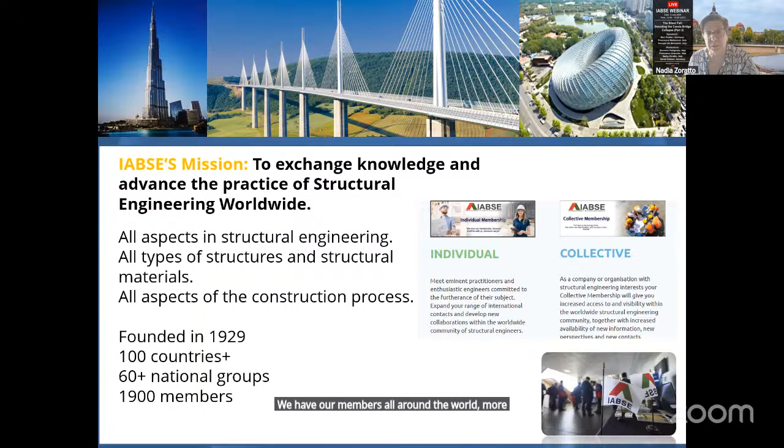If you are not yet a member of IABSE, you can become part of this great organization as an individual or collective member. We have members all around the world, in more than 100 countries, and for this reason we have several national groups that are very active organizing webinars and conferences. In Italy, we have a national group, IABSE IT. It was refounded recently in 2022, and we are promoting several activities related to technical task groups, dissemination activities, and training activity also.

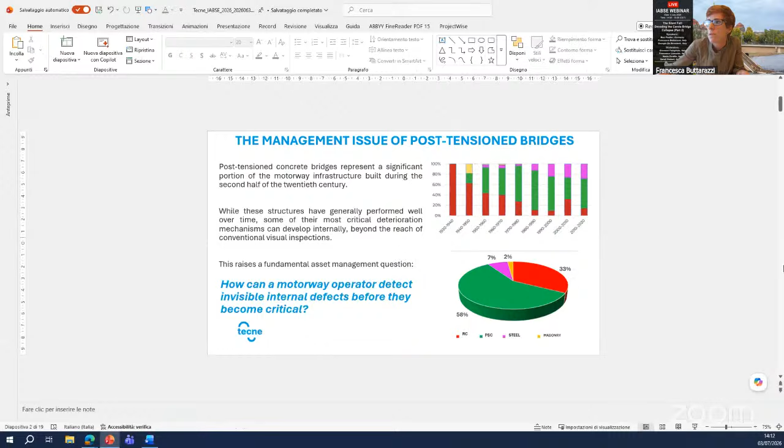So the question was, how can a motorway operator detect invisible internal defects before they become critical? And if you see the distribution of our bridges, you can understand that this is a very critical question for us, and we have to respond in an organized way.

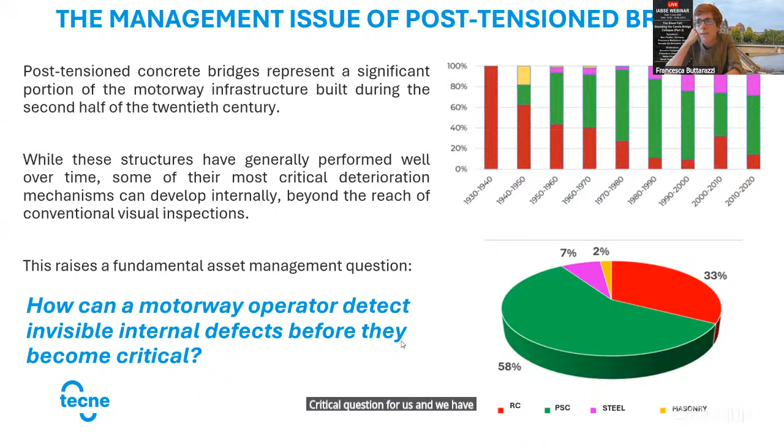To understand the problem it's also important to understand its scale. Here are some numbers about the Autostrade per l'Italia network: we have more than 2,000 bridges with a length over 10 meters, and 1,840 overpasses. The size and diversity of the network mean that special inspections cannot be planned as isolated actions. We have to answer many questions: which structures first, which girder, which cable, which samples, which techniques.

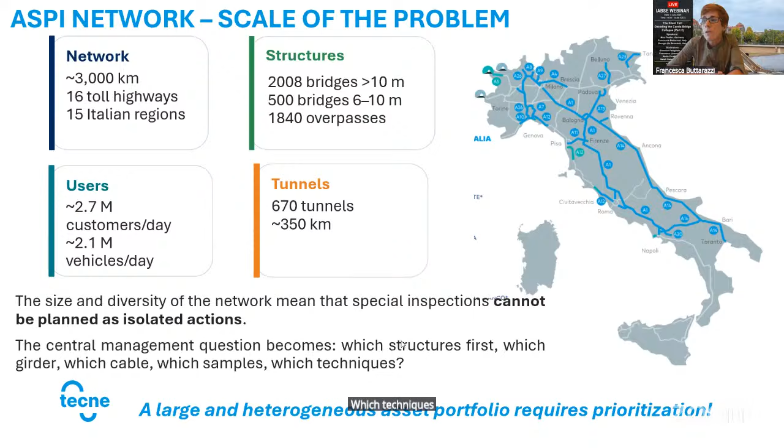This is why the answer has been an organized process that, starting from visual inspection, transforms the data collected during visual inspections into engineering decisions and a management strategy. To do this, we follow this chain of actions: prioritization, definition of sampling, diagnostics, and then we can define the proper strategy to manage the structure.

As you see, all these steps are in some way defined by guidelines. We are working on that, even with the regulatory bodies, with our Ministry of Transport, as well as some consortium of universities. You see here the FABRE protocol, but first of all the bridge guidelines issued by the ministry in order to adopt a multi-level, multi-risk framework for bridge asset management.

But the single manager also has the necessity to produce internal documents, such as the prioritization document or the one for technical regulations, in order to provide technical operational guidance on the various phases, because it's not always the same laboratory or the same engineer that does the inspection on the field. So it's important that activities are done following the same regulations in order to have comparable results.

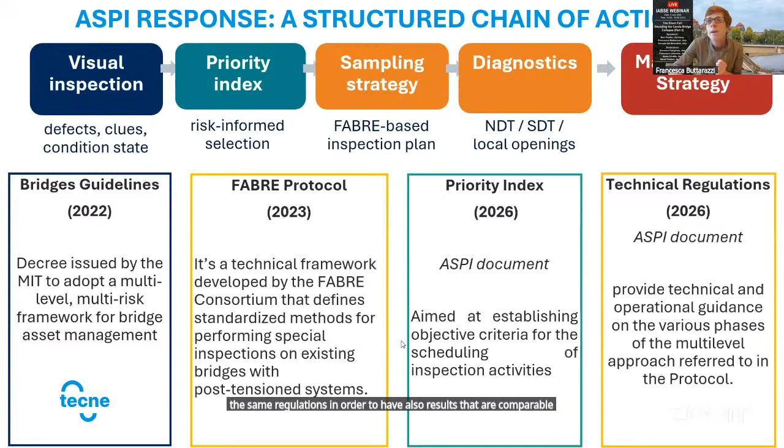Regarding the general framework, I want to give you a brief note on the Italian bridge framework. The Italian bridge guidelines have introduced this general framework to manage existing bridges. This flowchart has been translated - of course it's in Italian, but you have the reference of an article where you can find a full description. You see that the objective of this flowchart is to have an organized sequence of activities.

The objective is to define the interventions needed on bridges, but at the same time, through all these activities that start from the census, to the inspection, then to the classification of risk and the preliminary and accurate assessment, the goal is to reduce the risk of the network, as well as giving managers the priority to assess all the bridges in their portfolio.

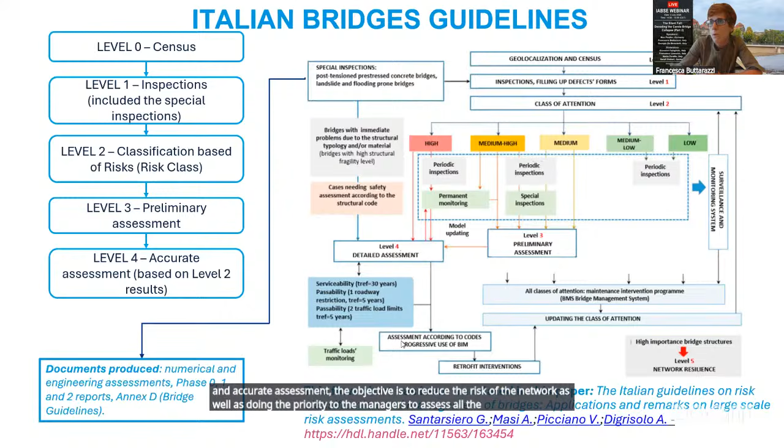So now we will go through the process I have shown you before, starting from visual inspections, which are in any case the first step you have to do, because we have to look for warning signs. These warning signs can be visible defects as well as warning defects.

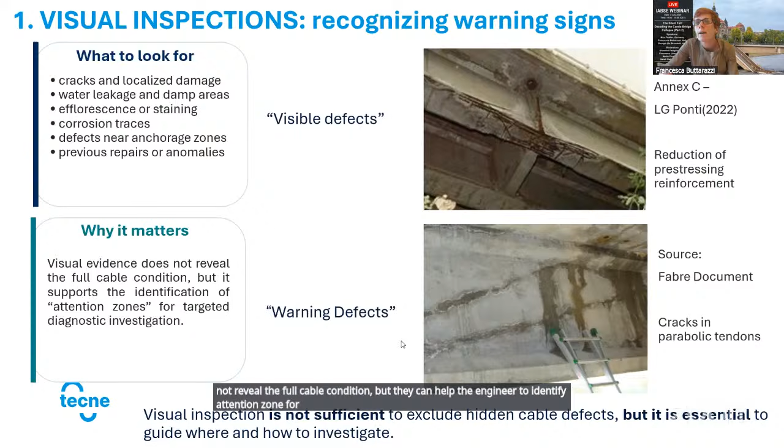In Italy, the bridge guidelines, or the FABRE document, have introduced this differentiation between defects that are evident - so you see cracks, you see the reduction of prestressing reinforcement, you know something is not going well in that structure - but there are also warning defects. These are defects that do not reveal the full cable condition, but they can help the engineer identify attention zones for the following investigation.

After we have done the inspection, we have all the data to do the prioritization. Of course, we also use the data collected in the level 0 phase, in the census. Here, in accordance with the Federal Highway Guidelines, we have defined a priority index that is a combination of a probability indicator of damage and a collapse consequence indicator.

So as with risk analysis, we also have something connected with exposure and something connected with vulnerability. Here we have used the weights defined in the Federal Highway Guidelines. In some cases, we have made adjustments for the Italian situation and also for ASPI's management needs.

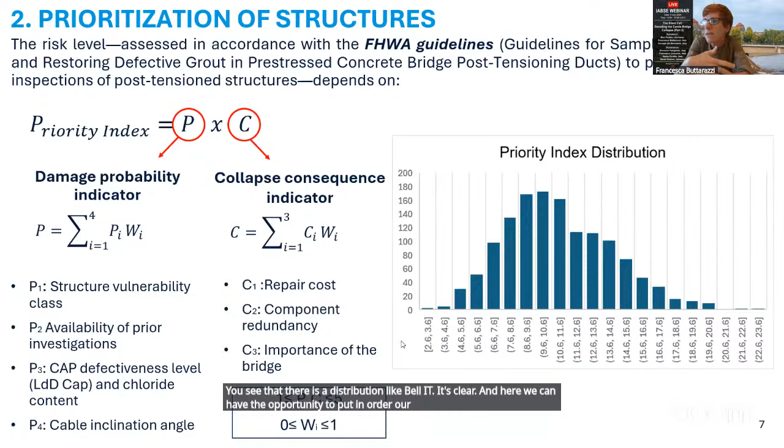After the selection of the bridges, we have another question: what do we have to investigate? Here we are following a statistical-based approach, which was first introduced by the Federal Highway document, as I have already mentioned.

In this case we have to make some assumptions, because we have to define the acceptable percentage of cables with defects. This is something we assess at the beginning, and then we can decide, after the first phase of inspections, if we have to change our initial hypothesis. In any case, we start generally with a 20% acceptable defects threshold, and then we define the total number of cables as a function of the number of beams and the cable number.

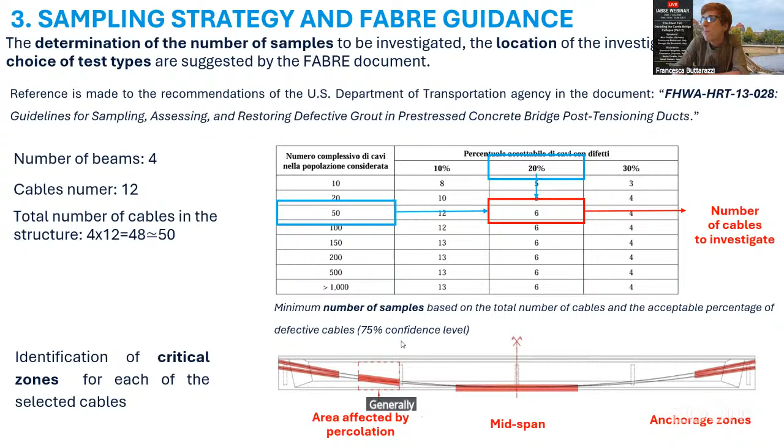For every cable, we also identify the critical zones where we have to do the inspection: the mid span, the area affected by percolation, but also the anchorage zones, which are generally the ones most affected by defects.

What we do now, after choosing the structure and deciding the sampling and where to perform the inspections, is follow an organized sequence of activities: first, localization with georadar and geometric reconstruction of the PT system, in order to localize ducts and cable layout before intrusive actions.

Then we have the phase of defect screening. I will show you some results later. We do this with ultrasonic tomography, and this is useful because we can identify potential voids or anomalous zones without destroying the beam.

And then we have the confirmation. In some cases, generally we do every time endoscopy, local openings, micro demolitions in order to go deeper into the defects and also to measure the corrosion, the lack of grout, and also the grout condition.

So our idea is no single technique solves the problem. Reliability comes from sequencing techniques and interpreting the results together. It's important to follow this sequence of actions in order to have the possibility to give the right answer.

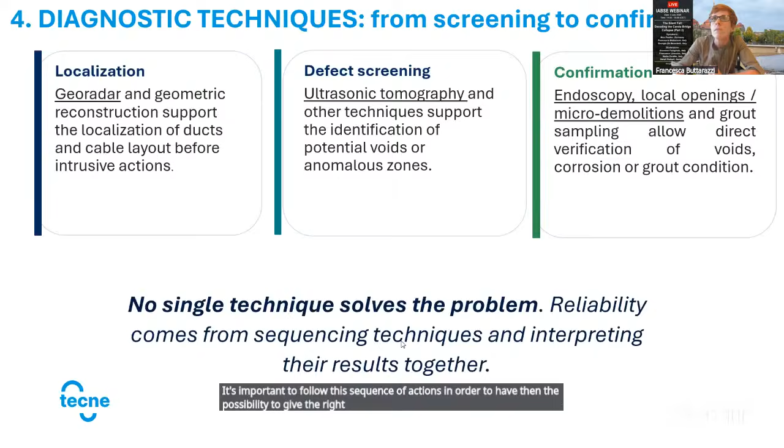Now I want to briefly touch on the different techniques. I know these are well-known notes, but I think it's interesting to show results from our in-field activities. For example, for the GPR technology that is used to determine the construction details, it is very important to set the frequency according to the depth of the object of investigation.

Sometimes it's also important to do some destructive tests in order to supplement the data acquisition. And it's important, the georadar, because sometimes we don't have the correspondence between the drawings, the as-built drawings of the bridge, and what we find in the field.

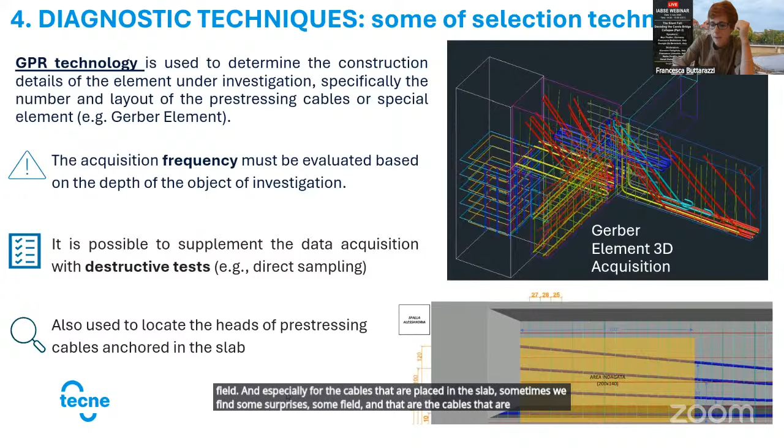Especially for the cables that are placed in the slab, sometimes we find some surprises on field, and those cables are frequently affected by defects. Tomography testing is also, as I've said, a technique that we always use in order to identify potentially anomalous zones.

These results can be interpreted in relative terms, and attention areas must be subjected to direct testing. Our experience is that generally in 50% of the anomalous zones, we then find also a defect. So there are some false negatives and false positives that have to be checked with direct inspection.

Just to mention that the tests are not effective if fiber reinforced concrete and beton plaqué are present, and it is important to not position tomography acquisition stations at the mid-span intrados of the beam or along the lateral surfaces of the slabs.

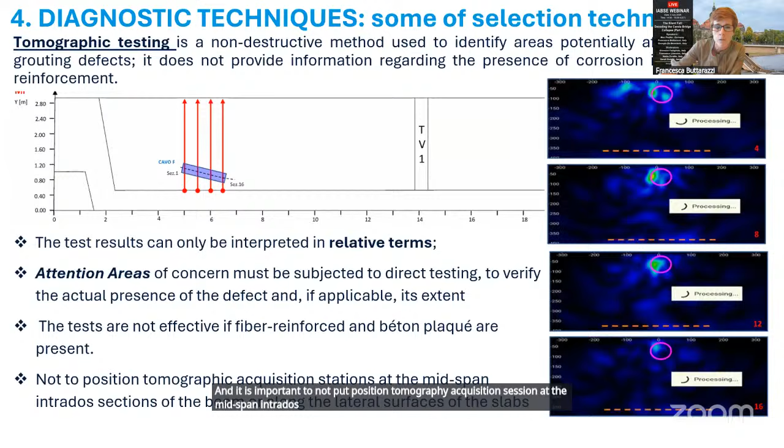Here is the technique that I like the most, because here you can see and measure, but in this case also we have a different approach. We start with endoscopy inspection, a very local inspection that must be performed carefully to avoid damaging the cable.

And then if we find some defects, we go with local opening wide enough to expose at least semi-diameter of the cable. There you also have the possibility to measure, for example what you can see in this picture: the reduction of the diameter.

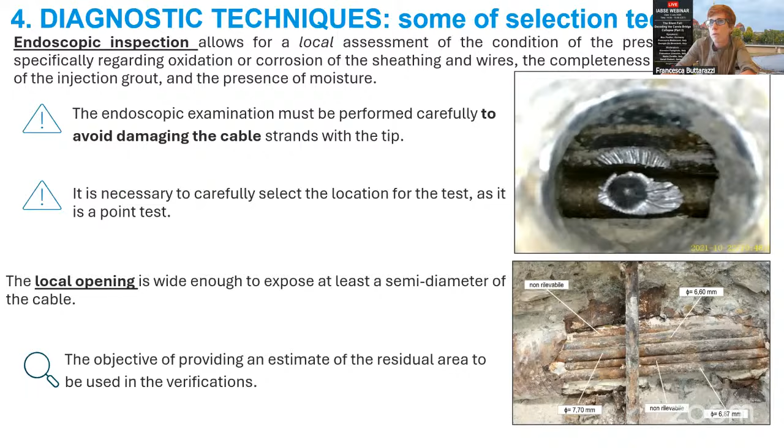In this case, you have all the information you need for the following evaluation of the structure. In some cases, we have also experimented with some digital X-ray radiography.

Digital X-ray radiography is used to obtain high-resolution images of post-tension cables. In these years, there have been developed low-power instruments that are compliant with the provisions of the legislative decree.

As you can see here, it's very interesting because with this digital ray you can really see the cable, the absence of grout, and in case you have defects, you see the defects.

For example, in this case, grouting defects you see here. These are some pictures that show the potential of this activity, of this technique.

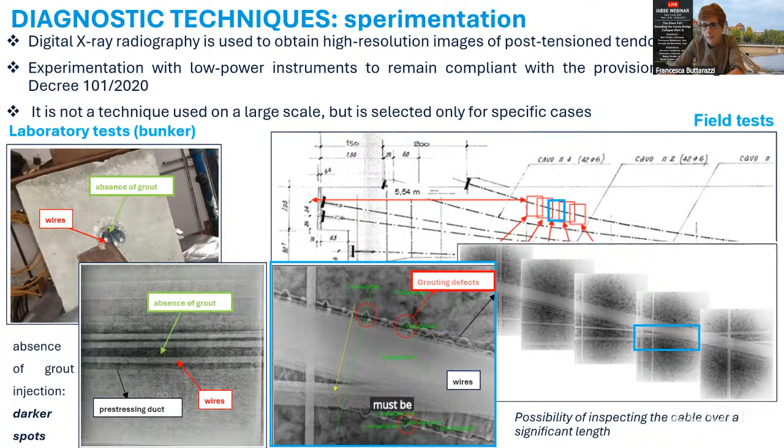What I want to say is this is a technique that cannot be used on a large scale, but must be selected for specific cases. And with this, we go also to another one, I'm really sorry.

Sometimes it's not sufficient to do local testing, but we have to do a global understanding of the structure. In this case, we use load testing or dynamic testing.

We are aware of the difficulties of using this testing to identify defects or crack patterns or something like that, because they are not tests that can be used to do that. But for sure, they can be used to assess the global stiffness, the integrity of the structure, and even how the joints of the structure are behaving and how they affect the behavior of the total structure.

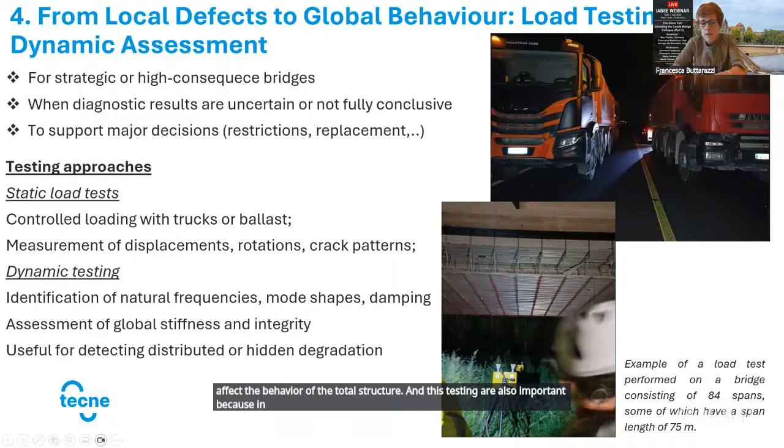And these testings are also important because in some situations we have to follow.

We have to follow up after the single inspection. We also have the possibility to install monitoring in order to follow the structure over time, especially if we have some deformation to monitor, crack displacement, something connected with environmental parameters. Acoustic emission strategy or techniques, which is the topic of the next presentation, is something that can be installed and used for monitoring activity on the structure.

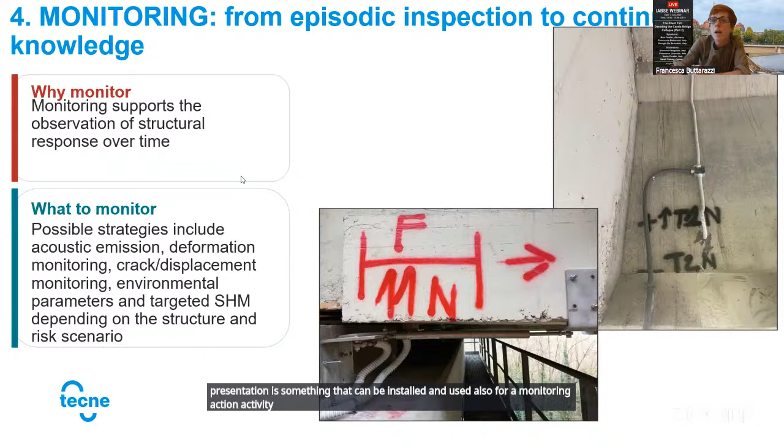Before wrapping up and going to the conclusion, I want to show you a case study from the ASPI network. This is a very long bridge, more than 1 kilometer long, representing 0.4% of the structures of the ASPI network. It's a particular structure, with a lot of beams and many cables.

We have followed the full process to investigate this bridge, starting from a historic analysis of all the data collected in the past. It's important to say this isn't new this year, but it's clear that now we have an organized approach that wasn't available before the issue of the bridge guidelines in Italy. We started with visual inspection, detecting 86 warning defects and 3 visible defects.

Then we moved to the sampling strategy, defining the critical spans to be selected and investigated, and the cables to be selected.

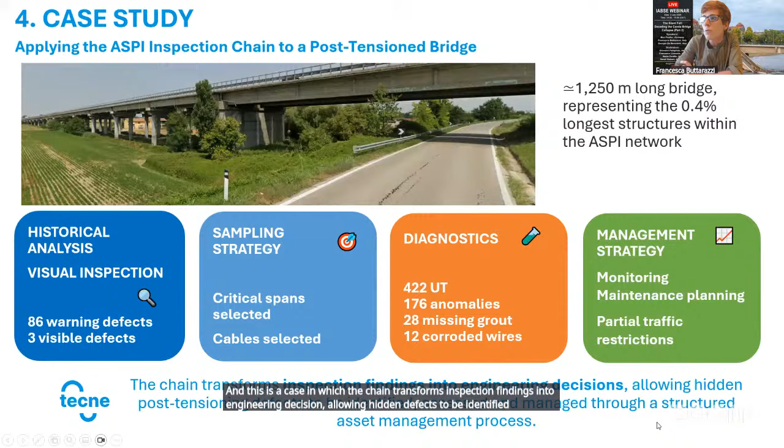This is a case in which the chain transforms inspection findings into engineering decisions, allowing hidden defects to be identified, assessed, and managed through a structured asset management process.

Before the conclusion, I want to highlight the importance of archiving all the data we collect. We have an Annex D, required by the bridge guidelines, which is a report we must produce with all the data we collect. But ASPI, Autostrade per l'Italia, is also working on a digital archive in the Argo platform, in order to have all the information connected to the beam elements of the structure.

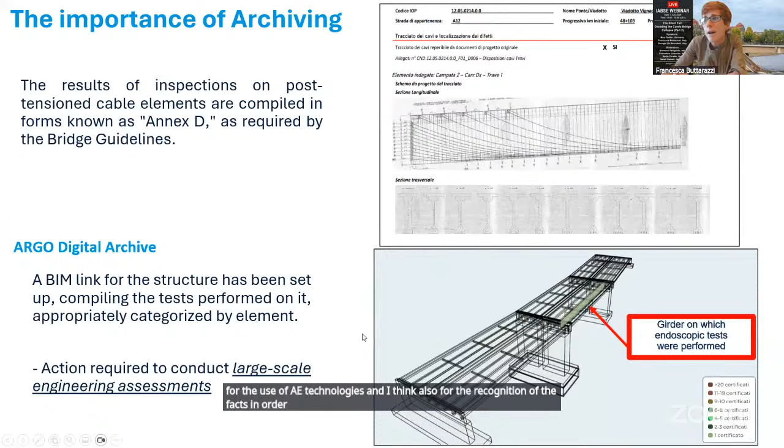So you can check before going on site whether you've already done some investigation, what's been collected, and if you need to do further assessment, you have all the data available. This work has great potential, even for the use of AE technologies, and I think also for the recognition of defects, in order to optimize our activity on site.

So let me conclude with a few messages. As I said at the beginning, hidden cable defects are a major management challenge for aging prestressed concrete bridges. Visual inspections are necessary but not sufficient; they must be integrated with targeted diagnostic campaigns. Prioritization transforms a large asset portfolio into a rational inspection program.

The FABRE-based progressive approach supports the selection of samples, the location of the investigation, and the choice of test types. As we have seen, no single technique is sufficient. Effective diagnosis requires a sequence of complementary methods, and interpretation is as important as measurement. Monitoring and formal reporting turn observations into decisions and allow continuous improvement of the system.

Knowledge must be structured and traceable. Inspection and testing data must be systematically collected and stored. So, to answer the question we posed in the first slide: invisible defects become detectable when inspection, diagnostics, monitoring, and engineering expertise work together within a structured asset management framework.

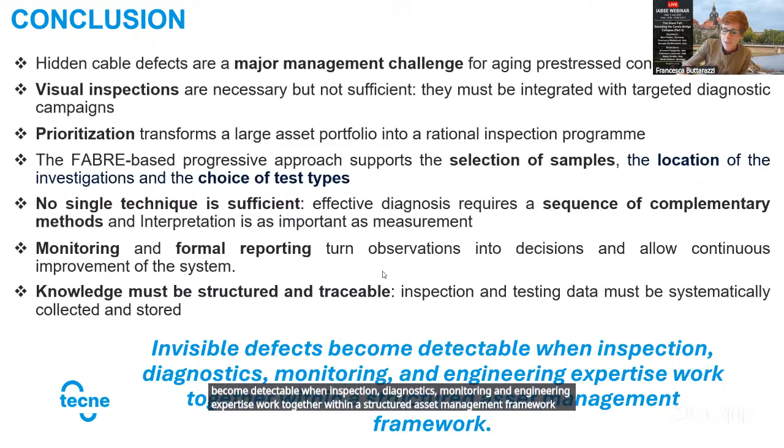Thanks for the attention, and sorry for some disturbance during the presentation.

I'm very pleased to give this talk on acoustic emission monitoring on prestressed concrete bridges, a topic that has followed me for almost 10 years now at MKP. We started our first project almost 10 years ago, and in 2016 we installed the first bridge with an acoustic monitoring system.

Even though, and this is something we have to say, it's not a new technology at all if we think about its applications. Already in the 90s there were first applications of acoustic emission monitoring, specifically for wire break detection. But after a long period of quiet, this technology arose again, especially in the last two years in Germany, due to the collapse of the Carola bridge.

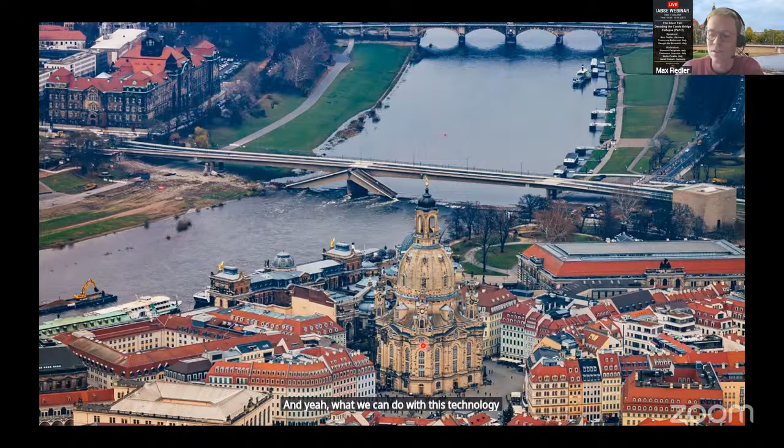What we can do with this technology is listen into the structure and detect the damage occurring within the tendons, within the pre-stressing wires that are suffering from stress corrosion cracking. Stress corrosion cracking, as Gregor already explained in the last session, is something that mostly starts evolving during the construction phase, and during the service lifetime it becomes more of a fatigue issue, so these wire breaks can occur over the lifetime of the bridge.

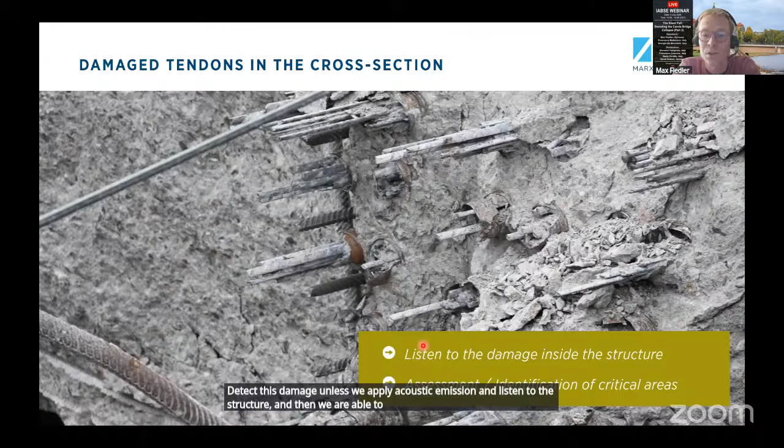Whenever we listen into the structure, and whenever we have to assume that the damage occurring inside is not propagating in the form of cracks to the surface, we are not really able to detect this damage unless we apply acoustic emission and listen to the structure. Then we are able to identify critical areas and assess these structures with this technology.

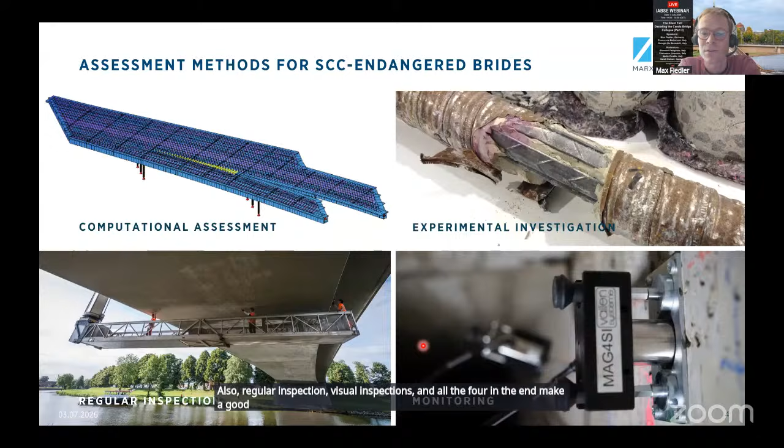In general, as Francesca already explained, for the assessment of such bridges we are not only using monitoring or acoustic emission, but also computational assessment, experimental investigation, diagnostic methods, and regular visual inspections. All four together in the end make a good assessment. So monitoring is only one part of it, and especially acoustic emission is only one part, but it complements all these existing methods, like computational assessments, in terms of continuity and immediacy.

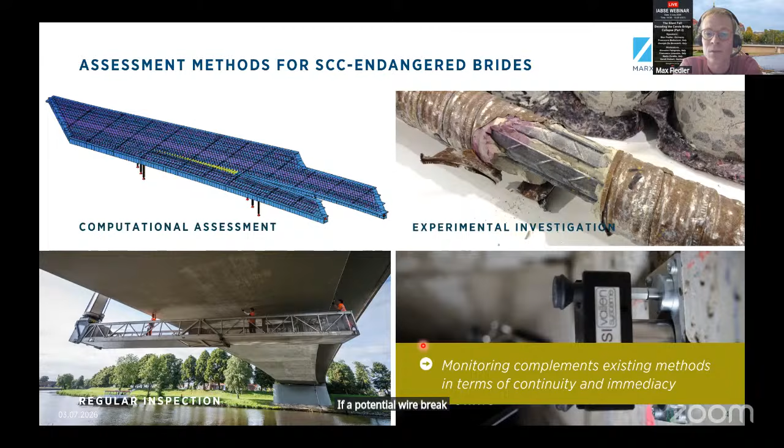Because what we are able to do with acoustic emission is that when we listen to the structure, we almost get a message in real time, an alarm, if a potential wire break occurred, and we are then able to react to this alarm. So what's behind acoustic emission? What does it mean?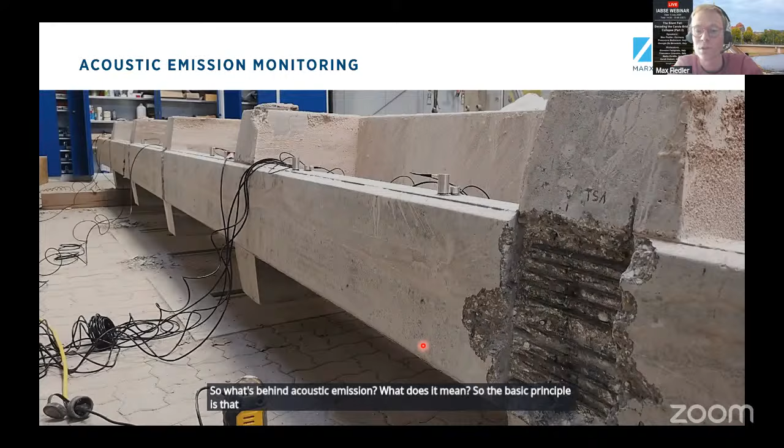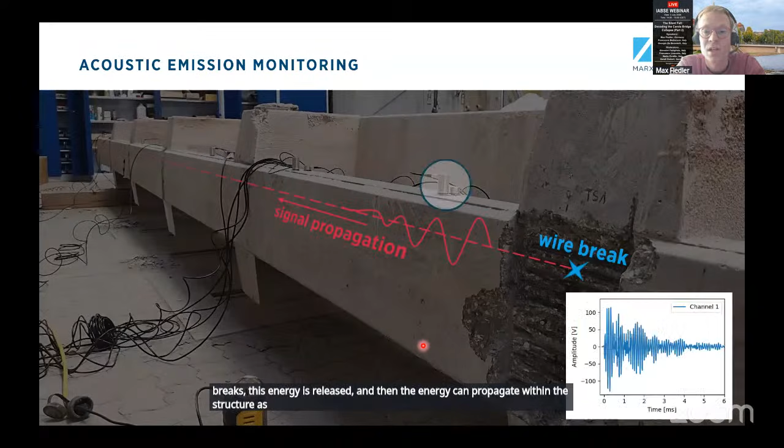The basic principle is that elastically stored energy within a pre-stressing wire is released when the wire breaks, and this energy can propagate within the structure as an elastic wave. Wherever we have applied a sensor to the surface, and whenever this wavefront reaches the surface, we are able to detect this wavefront and the energy within it.

When we talk about acoustic emission, we always have to take into account the propagation path the signal has already traveled. With longer propagation paths, the signal suffers from attenuation and scattering. This is something we have to consider when we analyze signals from acoustic emission sensors, but also the other way around: when we design a sensor layout, we have to take into account this attenuation and the possible intensity of the source signal, which in this case is the wire break.

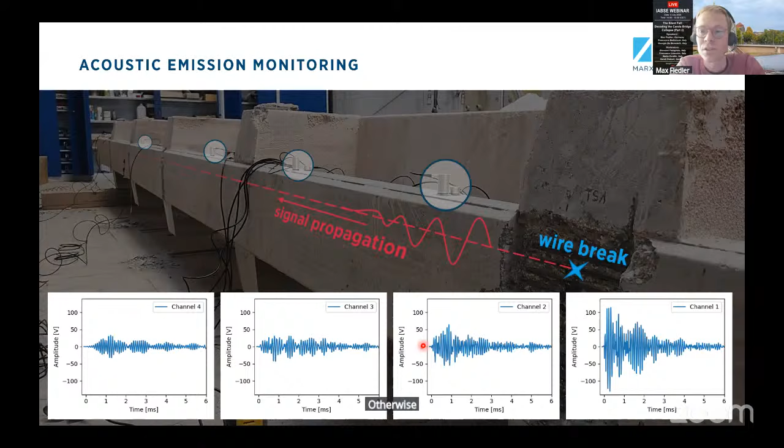This is something we always have to be aware of when we apply such monitoring systems. Sensor distances cannot be exorbitantly long; they have to stay within a specific dimension, otherwise we are not able to potentially detect all wire breaks.

Because this is a very complex method, it also comes with a lot of things you can do wrong. In Germany, we released a guideline together with Stephan Pirskawetz, for example, from the BAM, the Federal Institute for Materials Research and Testing, together with the German Society of Non-Destructive Testing.

Within this guideline, the fundamentals and possibilities, limitations of this methodology are explained, regulated, and the requirements for this measurement technology are described. There are some examples on sensor arrangement on the structure, the structure content is described, and also the qualification bidders in terms of a tender project are explained.

This is maybe interesting for the international community. This guideline is in translation, I think it's in the last review right now. Whenever you are interested, I think it's going to be released internationally within maybe the next half year or something too.

So I think there you have a good basis for applying this methodology. The application of acoustic emission sensors, from a measurement perspective, is one thing - meaning that you choose the right sensor, choose the right data acquisition properties, and are able to detect these signals. But what is actually more interesting is what do you do when you measure wire breaks or potential wire breaks, and you assess them as confirmed wire breaks?

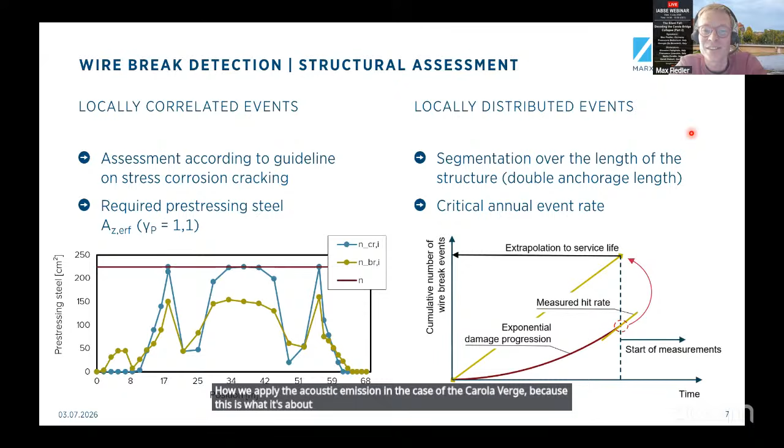First of all, of course, I want to show you how we applied acoustic emission in the case of the Carola bridge, because this is what it's about here. And then I also want to show you some examples from some other bridges that we worked on in the last year, which are very, very interesting, I guess.

So when we speak about the Carola bridge, I think you remember that at some point, the demolition of the superstructure C, which was the one that collapsed, was progressing, and at some point the River Elbe was about to be set free again, so to say.

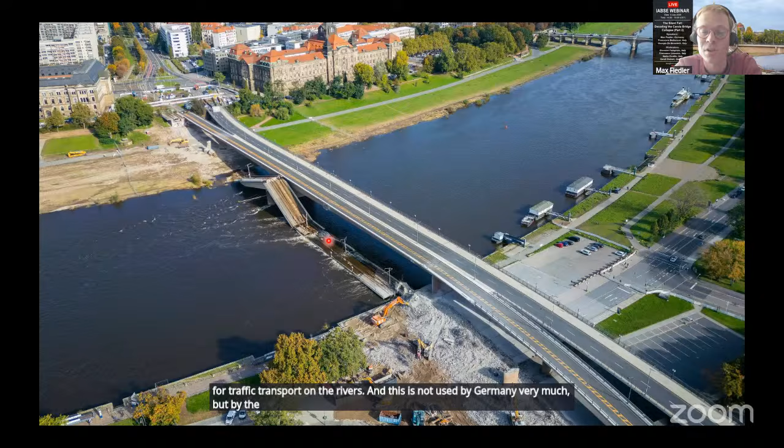And the River Elbe is a federal estate for traffic transport on the rivers. This is not used by Germany very much, but by the Czech Republic. And the Czech Republic had a very high interest in transportation of high load freights on the River Elbe.

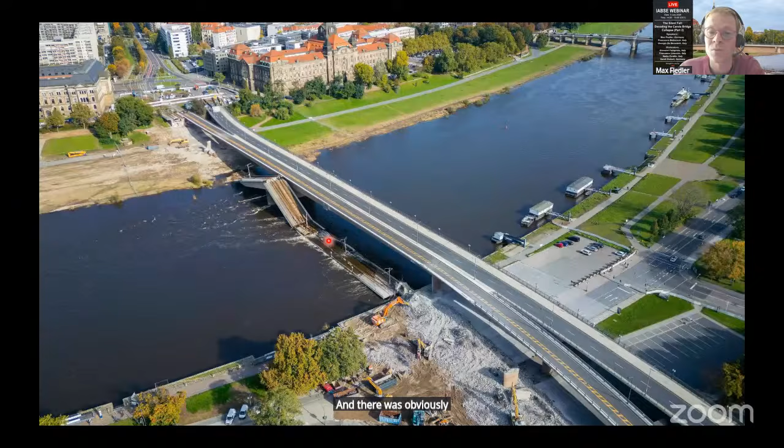So the remaining superstructures needed to be assessed in terms of their remaining load bearing capacity. And as we found also damages, endangered wire breaks there, there was obviously the question: how are these superstructures, do they still have enough load bearing capacity?

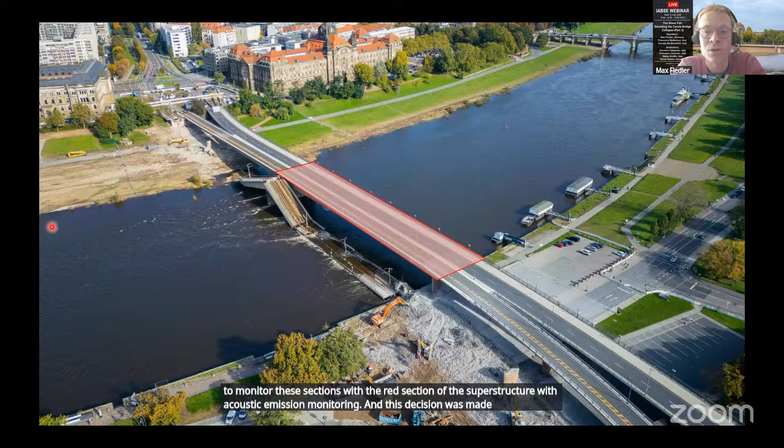This is when the city of Dresden decided to monitor these sections, the red section of the superstructure, with acoustic emission monitoring. This decision was made somewhere around mid-December '24.

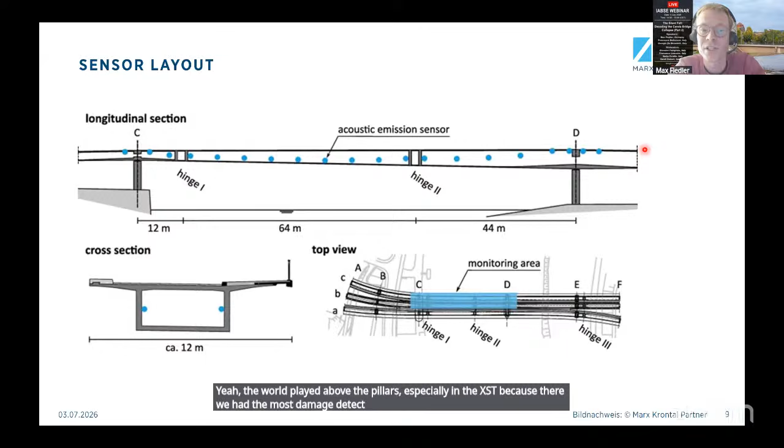And here you can see the sensor layout. So we only focused on the section between pillar C and pillar D, following the tendon line, and focusing also specifically on the road plate above the pillars, especially in axis D, because there we had the most damage detected from the diagnostics. This monitoring concept was then implemented within, let's say, 4 weeks.

By the 2nd, 3rd of February, the technique was installed. And then we decided to have a preliminary monitoring period, so where we just wanted to observe what's happening within the bridge before we allowed some ship passages to happen.

As it always is during such a period, you can see here some signals over time, and the acoustic emission feature, which is the peak amplitude on the y-axis. Within this period, we had nearly no serious acoustic emission. Some came from diagnostic work, some from electromagnetic coupling because of the electricity inside the bridge, as switches went on and off, but nothing really severe or specific.

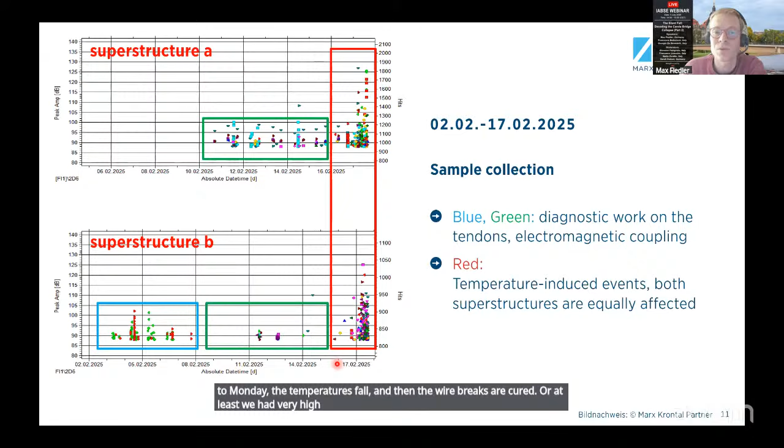Just from that day, on Monday the 17th of February, we wanted to start with the ship passages. And as it always happens, from Sunday night to Monday, temperatures fell, and then the wire breaks occurred - or at least we detected very high intensity, very specific characteristic signals.

These signals were localized directly within the plate, directly above pillar D - sorry, localized there in the superstructure. So what we did before installing the monitoring system was try to guess how many wire breaks we could allow during this monitoring period and the remaining service lifetime.

We put a traffic load into our model, assuming that before the collapse of superstructure C, the other superstructures were able to bear a load of 2 kilonewton per meter - very light traffic load. We translated this traffic load into allowable wire breaks, which in the case of pillar D were 14 wire breaks.

So in one night, from Sunday to Monday, we detected several wire breaks within this plate, and our allowable wire breaks reduced by about one third.

There was a lot of trouble within the administration, as you can imagine, and we were thinking: how can we progress with this? Because with every night that passed, the allowable number of wire breaks could reduce by a significant step. So we needed more time, so to say.

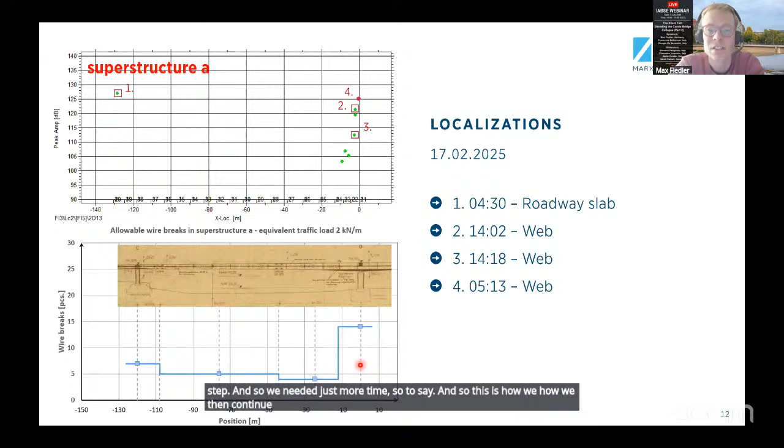This is how we then continued, just day by day. We very closely observed the incoming signals and decided day by day what we could do.

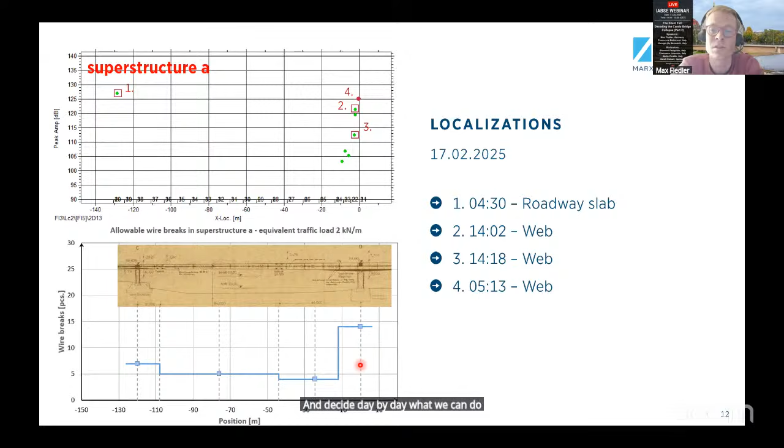After a further period of observation, two weeks later, we finally allowed some ship passages. Every time we had no further signals or events detected related to wire breaks, we became more sure that this was a good way forward.

This was very intense for the people within the project, because every day you had to make the decision: can a ship passage happen or not.

Another example I want to show you is the Waren-Herrensee Bridge. Waren is a city in North Germany. This bridge is a roadway bridge passing over a railway line - a very important railway line towards northern Germany - and also some other federal roads.

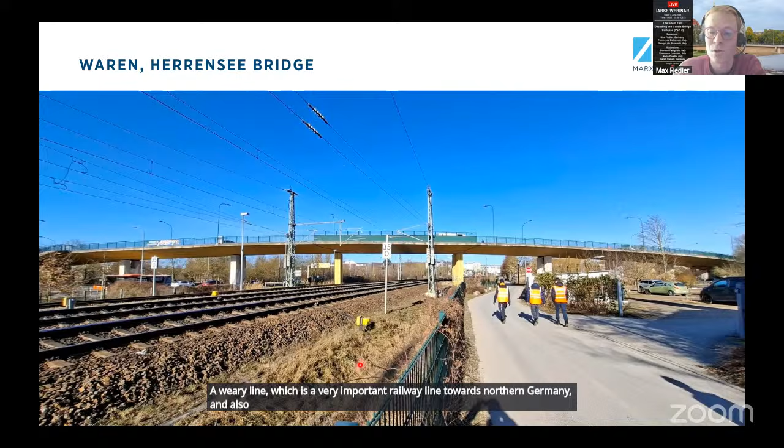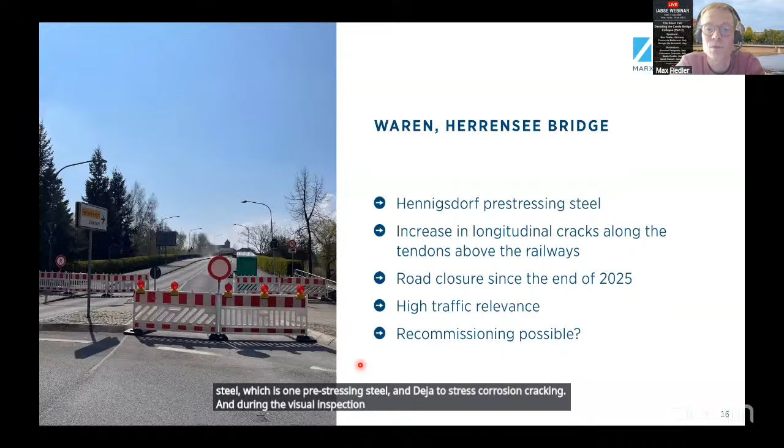This bridge was constructed with the so-called Hennigsdorfer prestressing steel, which is a prestressing steel prone to stress corrosion cracking. During the visual inspection of the superstructure over the railway, longitudinal cracks were observed, which led to the closure of the bridge by the end of 2025.

Since this bridge is of high traffic relevance for the city - otherwise the detours are very long - the question was: what can we do to maybe recommission this bridge again?

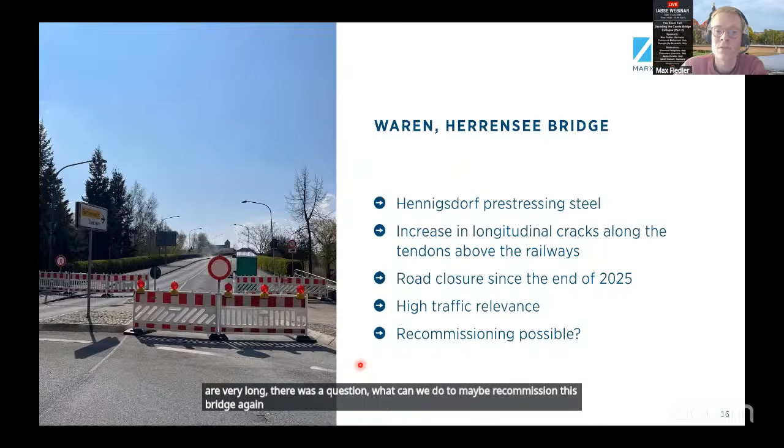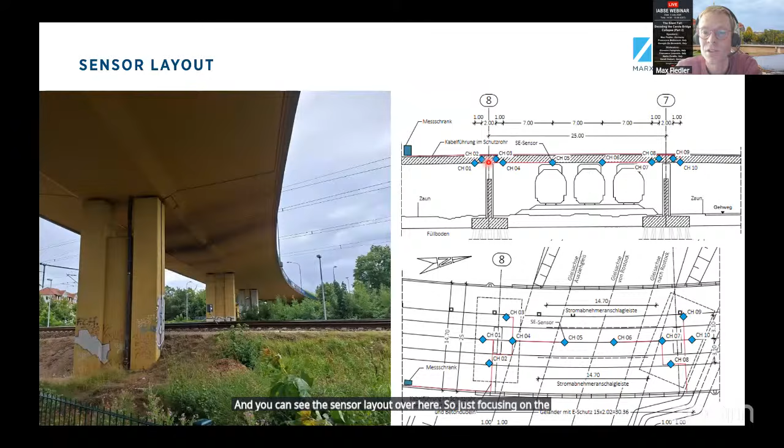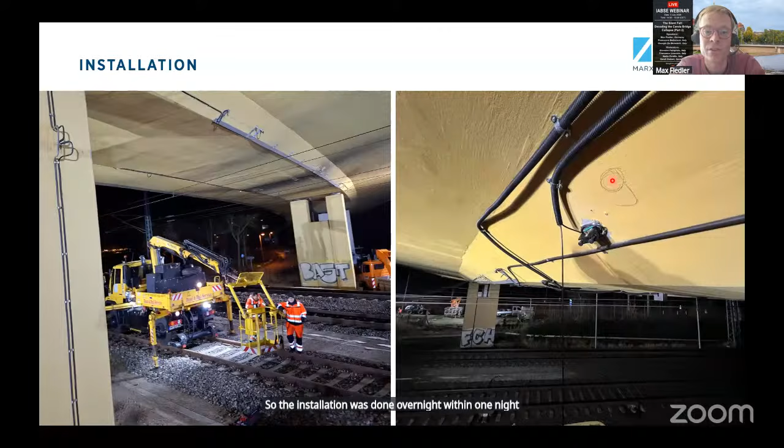Just focusing on the two neighboring pillars and the railway field, the installation was done overnight, within one night, and the diagnostics were done the same night. There was a lot of different traffic under the bridge, a lot of people around, trying to gather as much information in as short a time as possible.

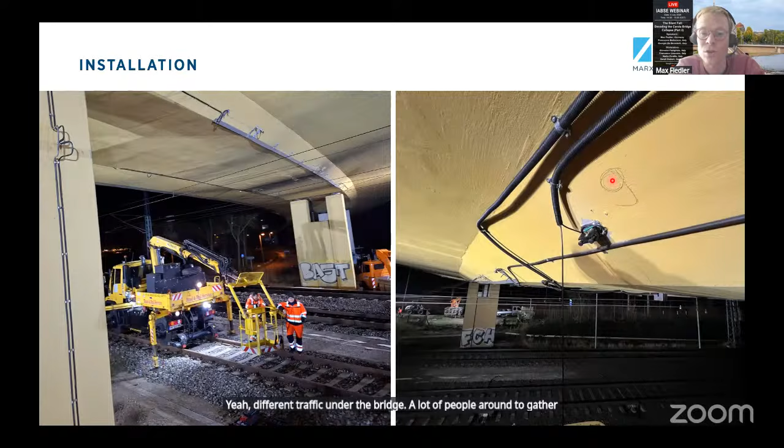This monitoring system was then in operation for almost three months, and nothing really happened. So we were pretty sure we could continue with this bridge on a very good basis.

We developed a diagnostic program where we wanted to do tendon sampling and material sampling on the tendons from the upside of the bridge, in the pillar areas.

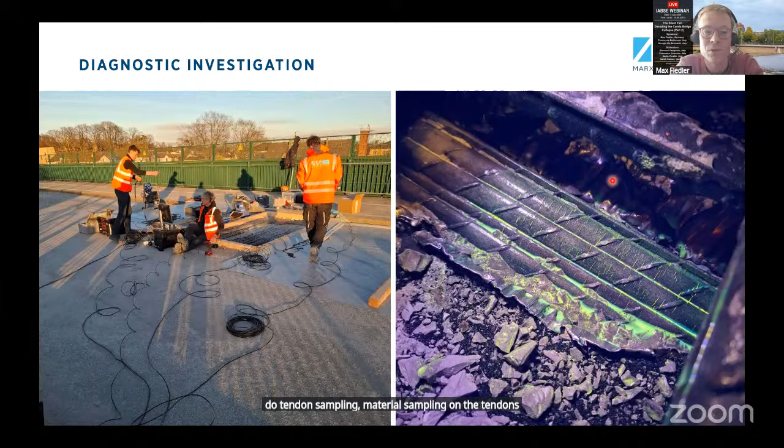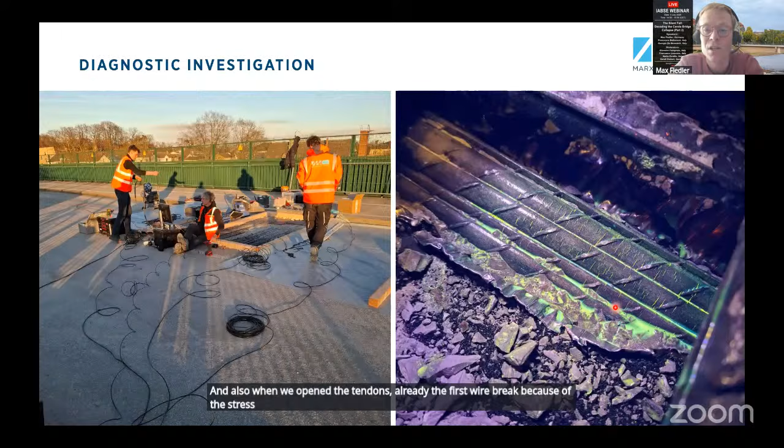What we found there was a typical formation of these cracks - a stress corrosion cracking indication. Also, when we opened the tendons, there was already the first wire break because of stress redistribution - direct sun on the wires causing a different stress situation - so this wire broke spontaneously.

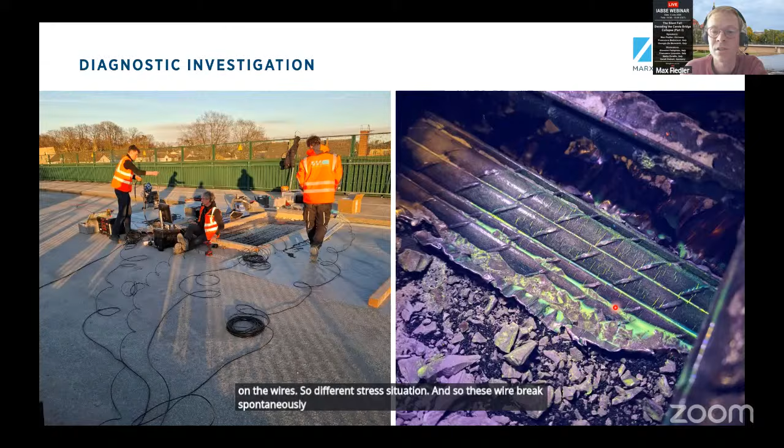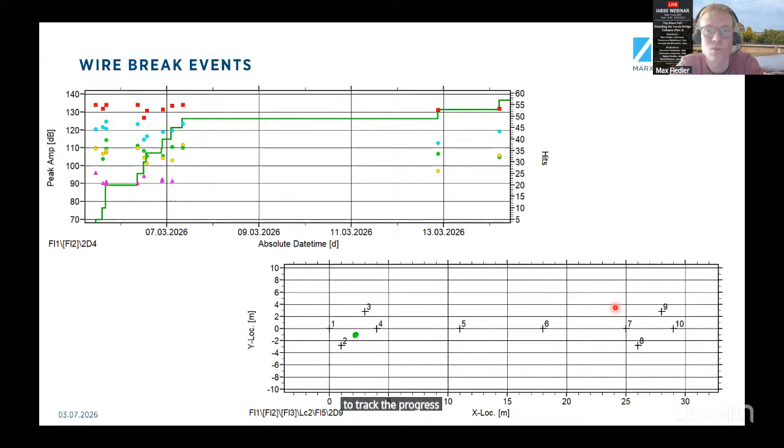We then closed the tendons, and since we already had this monitoring system installed, we were able to track the progress of damage very specifically in this case.

So on the 6th of March, which was a Friday unfortunately, and the tendons were already covered with concrete, even more wire breaks occurred spontaneously. As you can see here, we were able to measure all individual wire breaks. And as you can imagine, when you have such a situation on a Friday and it's not stopping, you're getting nervous.

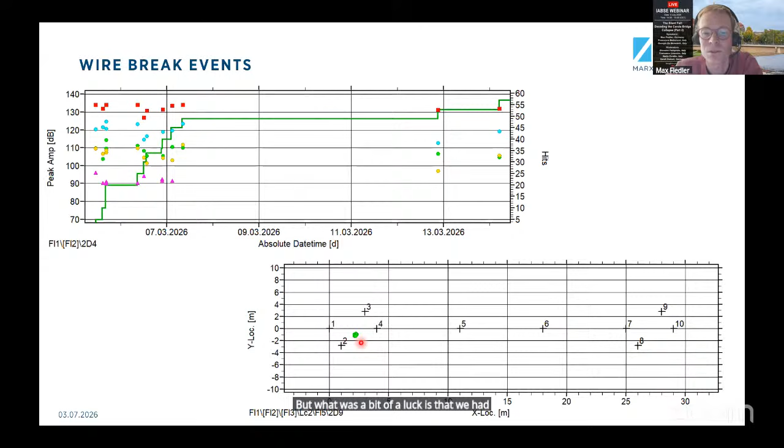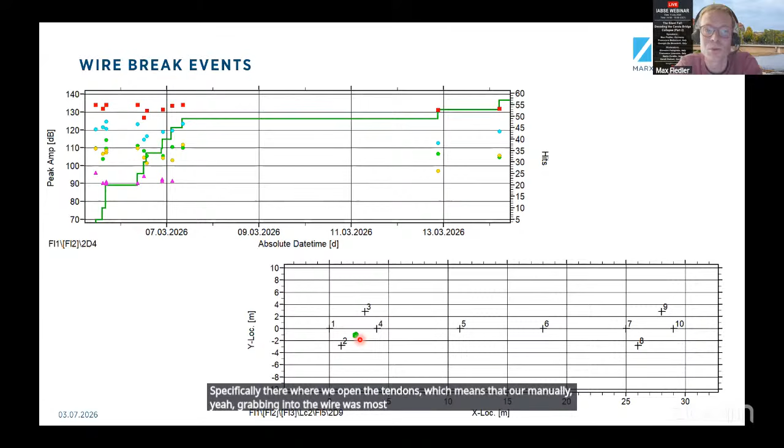Because at some point this could lead to a collapse of the part, meaning the bridge falling on the railway tracks. But what was a bit of luck is that we had a very narrow network around the pillar, and we could really, with high precision, localize these wire breaks specifically there where we opened the tendons, which means our manually grabbing into the wire was most likely the impulse for the wire breaks to occur.

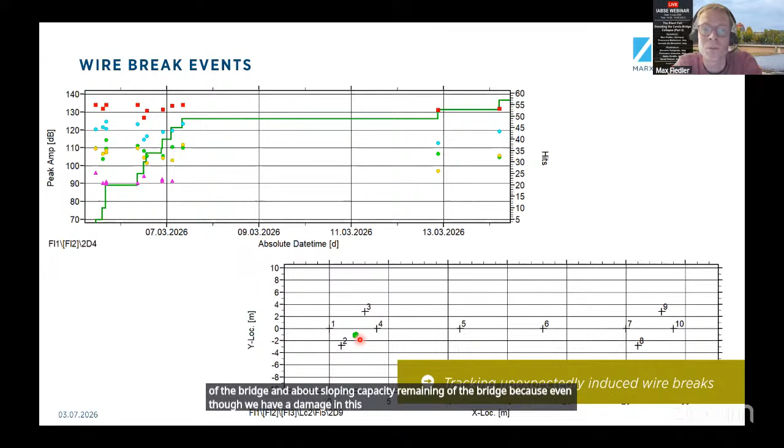This tracking of these unexpectedly induced wire breaks is something that, to my knowledge, was not done before, and which in this case is very interesting, because with this knowledge we are able to give information about the assessment of the bridge and about the remaining load bearing capacity. Even though we have damage in this system, we know how much, and we know, because nothing else happened elsewhere on this bridge, that we can possibly have a future with this bridge in some case.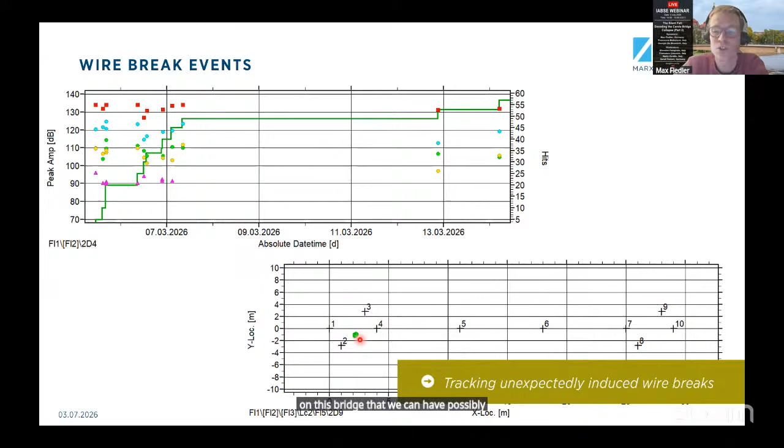Another example I want to give you is another bridge in Dresden, the Budapest Street Bridge, which was given to us closely after the Carola Bridge, because the city of Dresden was very nervous about their bridges at that time. Since the designer of the Carola Bridge was the same as the Budapest Bridge, and the Budapest Bridge was a bit younger than the Carola Bridge, everybody was pretty nervous about it.

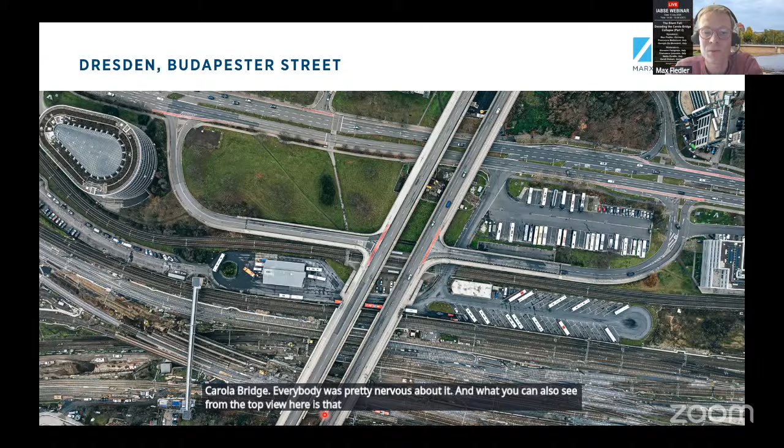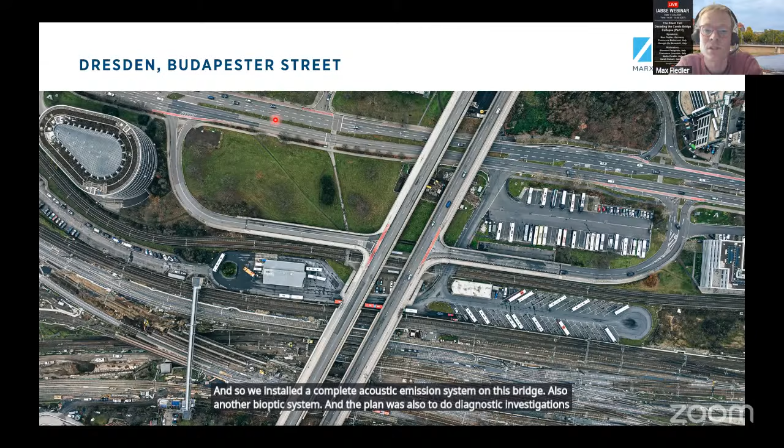From the top view here you can see that we are passing a lot of railway lines close to the main station Dresden, located over here, and also a very important street in Dresden, the so-called Ammonstraße. So we installed a complete acoustic emission system on this bridge, also another fiber optic system. The plan was to do diagnostic investigations on this bridge, just to get a complete assessment, or the foundation for a complete assessment.

From the beginning of the monitoring, we had some really suspicious signals. For a period, we just observed the signals and the bridge behavior over a certain period of time. And what was taking our attention is that everything concentrated on one axis, which is here axis C.

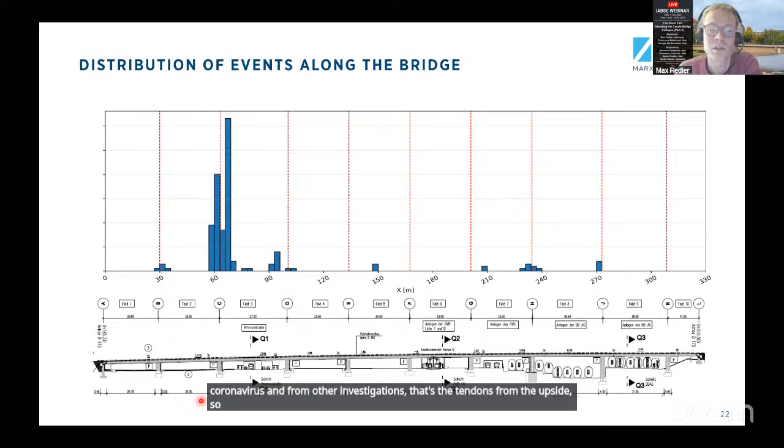As you can see here, the bridge in its longitudinal section, all the railway roads, and here this Ammonstraße, as I said before, so this axis C got a highlight for us. Since we were planning the diagnostic measures, we specifically planned to go into this axis. And since we knew from the Carolabrücke and from other investigations that the tendons from the upside, from the top of the pillar, are the most endangered, we also went there from the top side into these tendons.

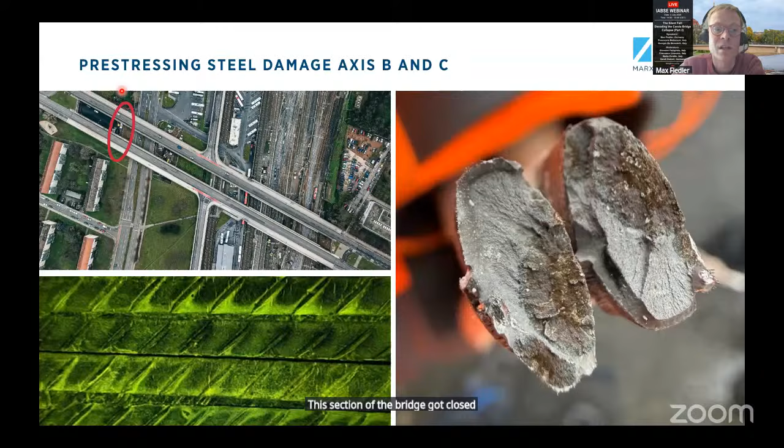Because closing the Ammonstraße was not really an option, there needed to be some emergency supporting of the Budapest Street Bridge, and this was designed in a very specific manner.

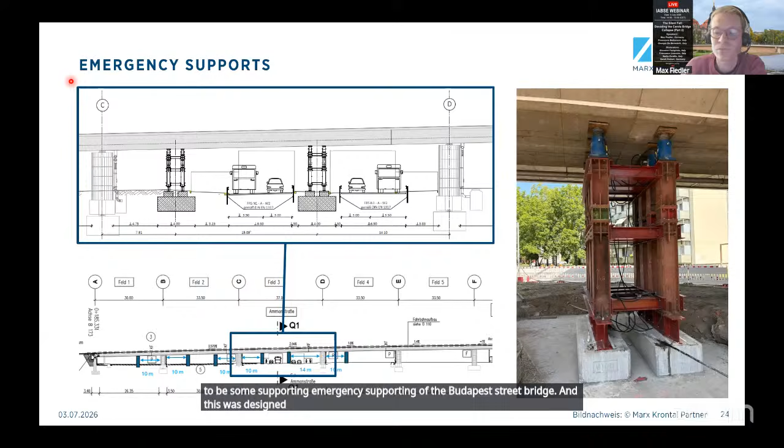So to conclude from this, I hope I could show you that the application of acoustic emission delivers a lot of potential for a very specific assessment of critical structures and also identifying critical structures. These are three examples of critical structures, but at MKP we monitor 25 bridges now, and these are some of the few that are very critical. So we can also say for the others, which have shown no critical events, that they can remain under traffic for further decades, so to say.

And what it also enables is implementation of very targeted measures, as seen in the last case. And the standardization in this field made everything more transparent, especially for authorities. And this is something that is very helpful for everybody, I think.

It also needs to be highlighted that acoustic emission monitoring is only one component in the assessment strategy for stress corrosion cracking, because you always need to have a recalculation and an escalation concept in cases of damage events or critical cracks showing. Diagnostic is a very important tool, and also experimental load bearing assessment can be a part, meaning load testing, whenever you talk about recommissioning of bridges. So thank you for your attention.

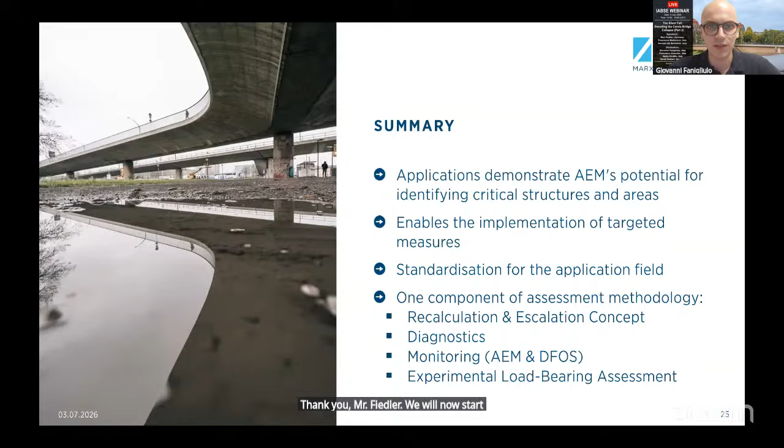Thank you, Mr. Fiedler. We will now start the Q&A session with two questions from the public. Mr. Holberg has a question for Francesca. He asked about the assessment of vulnerability, not necessarily collapse, in your assessment process. He also expressed interest in how the data is acquired for quantitative assessment.

Good morning. I try to answer because Francesca has a personal commitment. How many bridges do we assess in the year? We are organized to do a program, and this year we check up to 20 bridges, 20 structures. For the following year, probably the same number we try to check. This is the situation, okay.